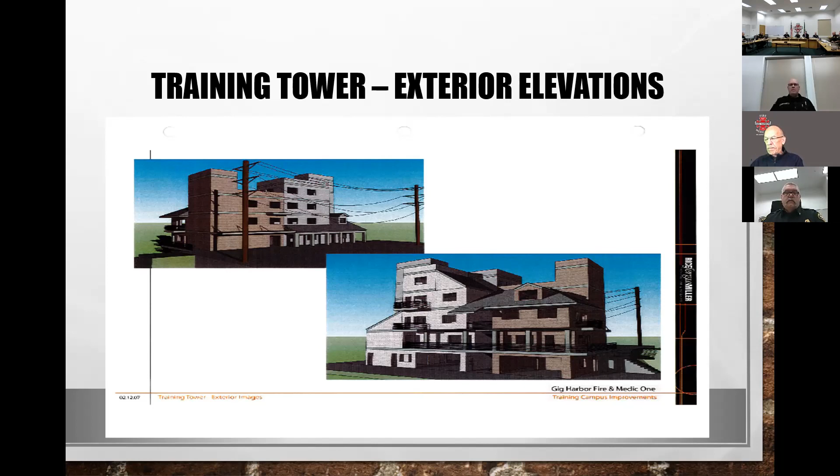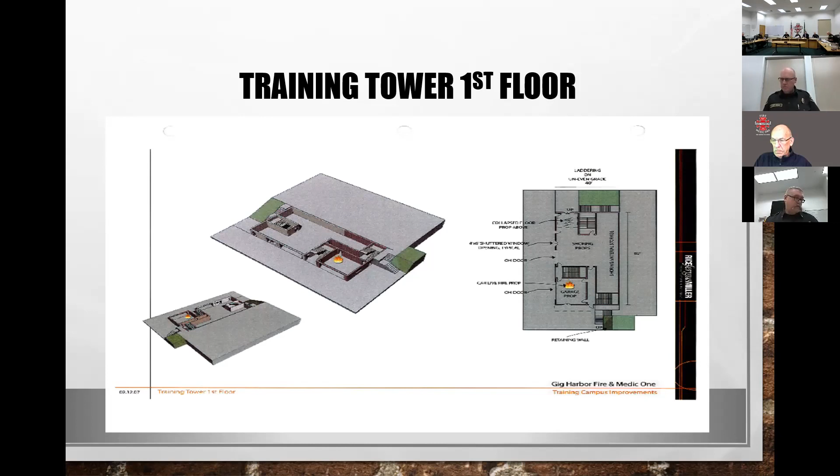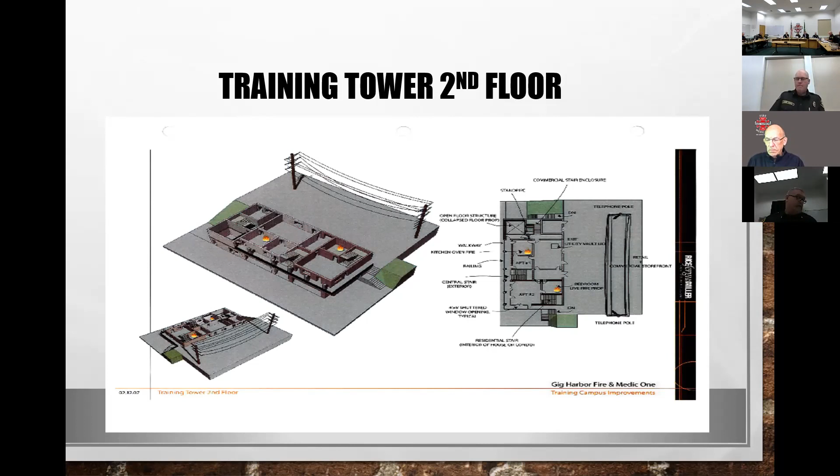Along with two different apartment props and bedrooms, with a live fire prop on floor 2 and the live fire prop in apartment number 1.

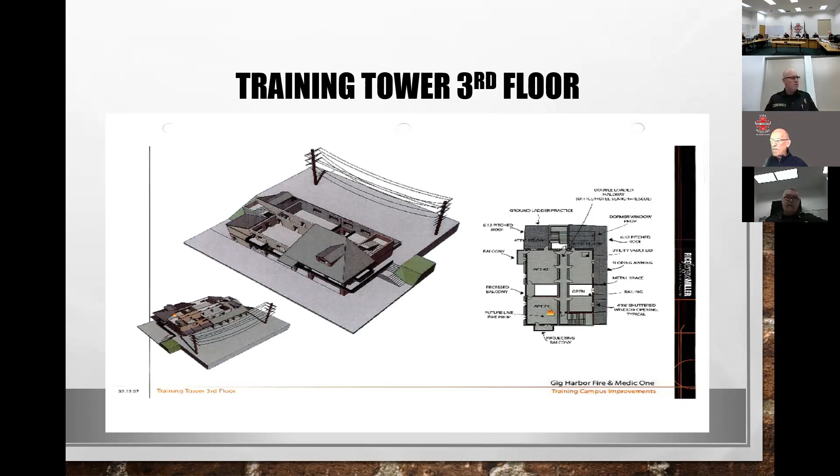We have a pitched roof prop, two different pitches for vertical ventilation training, with some balconies that are going to be used for viewing of the folks drilling potentially on the ground below the training tower.

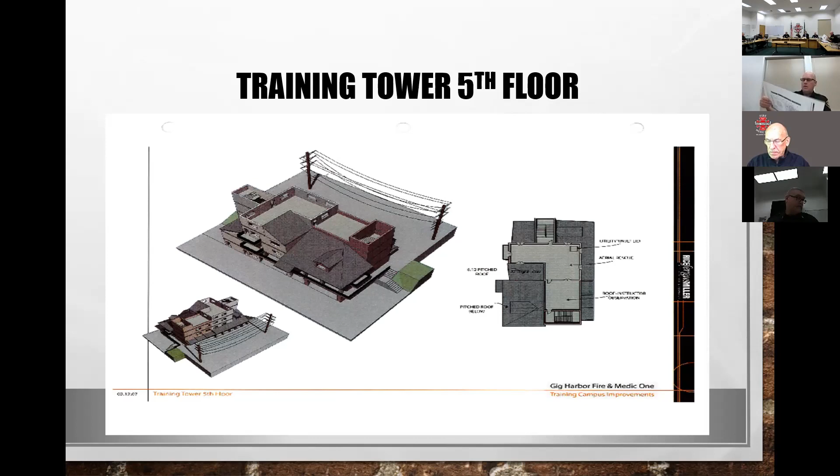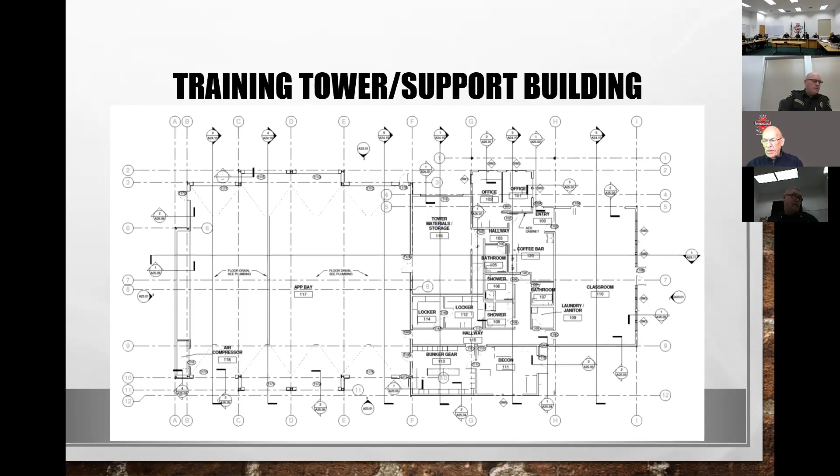As our training needs have changed, based on these drawings we are looking at making some simple changes, simply adding an elevator and making one of the storage areas a classroom, using the elevator as a training prop and as access to the 2nd floor.

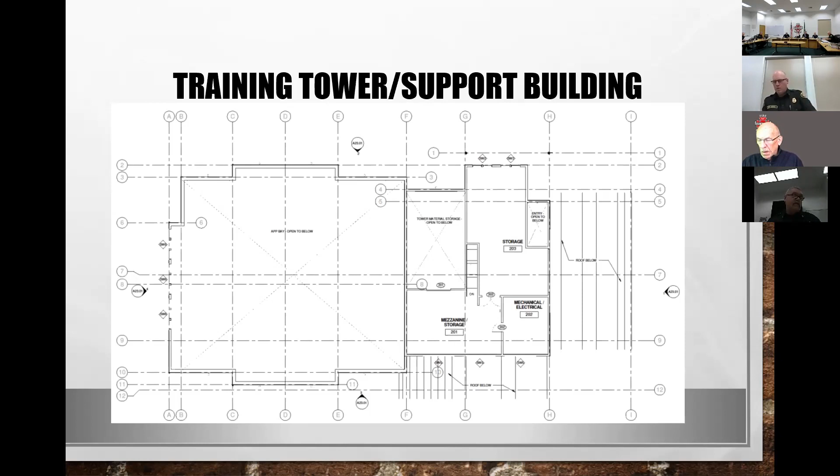As we gain structures of height requiring elevators within our district, we're encountering more and more elevator rescue, and that opportunity to put one in for us to train on within our training facility will help us out greatly.

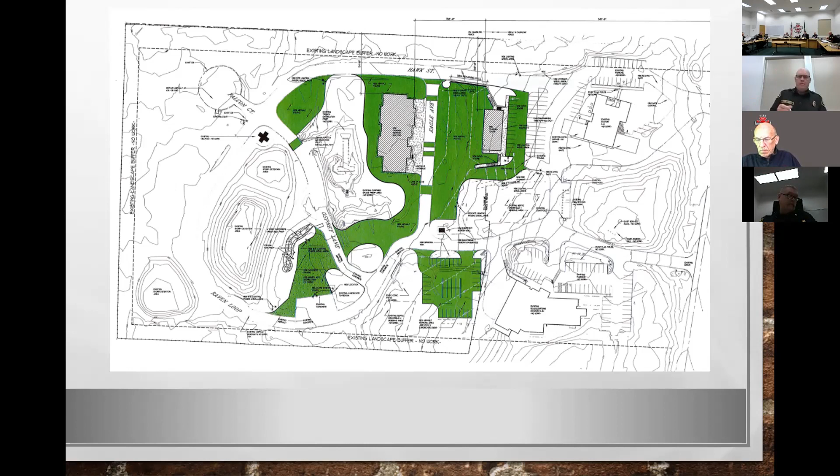So we have cost breakdowns for each project. As I said, they're estimates. Right now, our highest priority is completing the training campus. So we are looking at the training campus as being our first building, if the capital facilities project is approved for moving forward.

Once again, those numbers aren't included here, but if we look at the overall cost, the training tower alone is $7,413,300. Moving over to the support building, $7,281,000. And then just the site improvements for us to be able to do the work, the extra paving and those things, are $3,305,154.

If we look at the top, it's estimates, with construction cost escalation of 6% per year, moving from April of '22. And then down below, we pay sales tax as a fire district to build something just as well as anybody else does. So we have Washington State sales tax, architecture and engineering fees, specialty consultants, permits, testing and inspections. Some of the furnishings and equipment would be the tables, chairs, office furniture, those things we're looking at including.

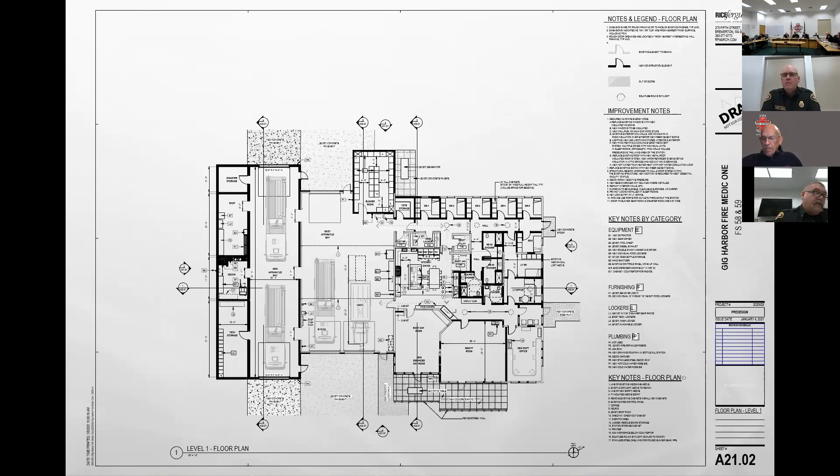For the firefighters, we still also have new walls there, a new public entry, which we can isolate - if someone comes into the station, they can come into that space without gaining entry into the rest of the station unless we let them in. So if we go to the next slide, it's a little better of an illustration.

Any questions so far? All right.

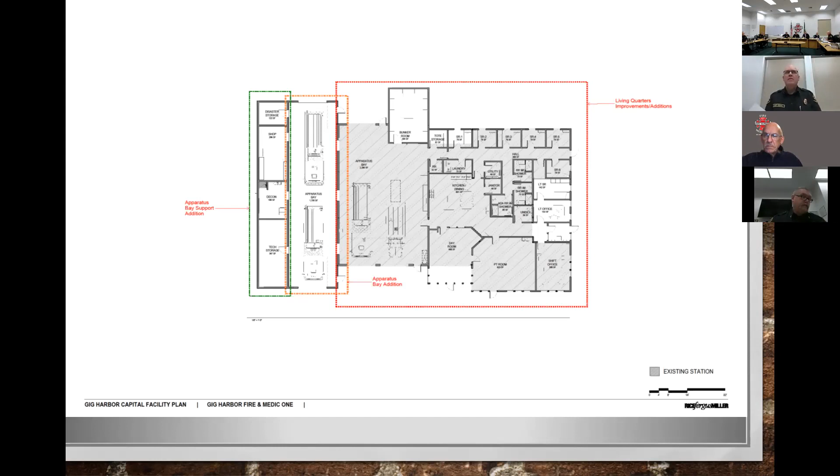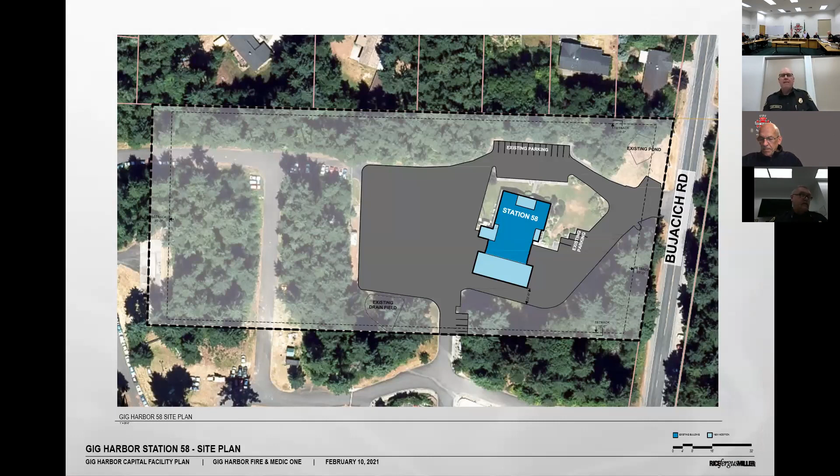Next few slides, we have one of these for each of the requested capital facilities, simply showing you that the light blue are additions, the dark blue is as the station sits currently. So that's for station 58, and then 59.

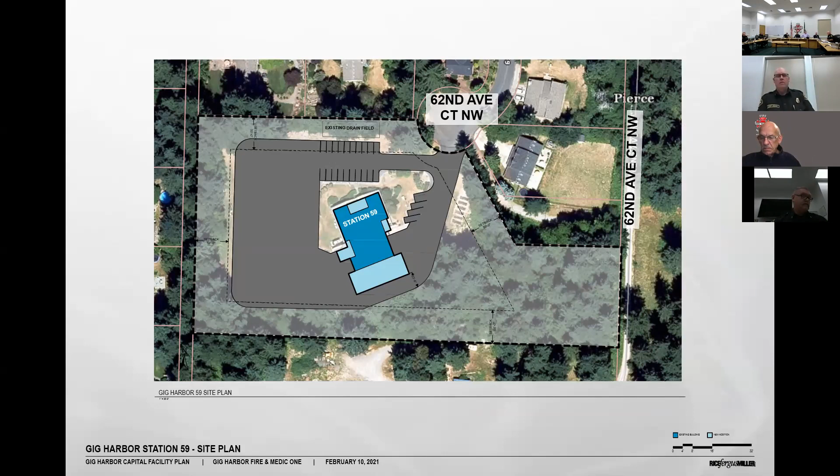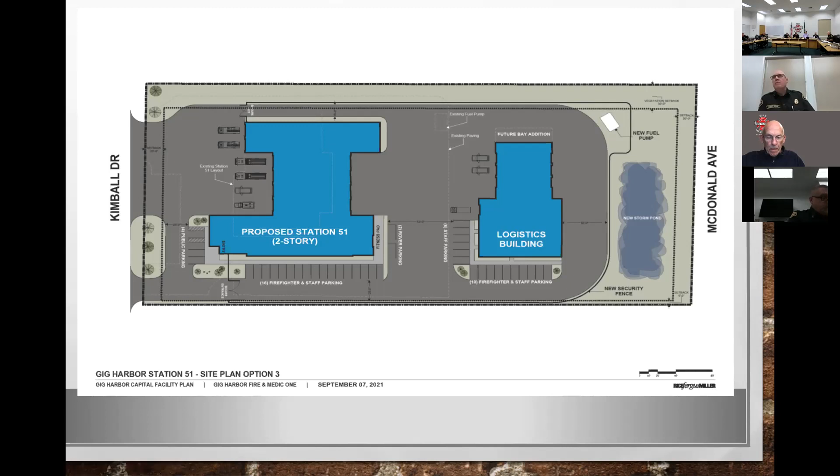Moving across the drawing towards the bottom, we have 4 bays with a different array of equipment. We're not sure what it will be in the future, but we have the ability to go out the front or out the back. Our primary response vehicles will all be out of the front of the station. On the drawing there's 2 engines, a truck, and a medic unit, but we don't know what that configuration will be right now. It gives us the space to do what we want.

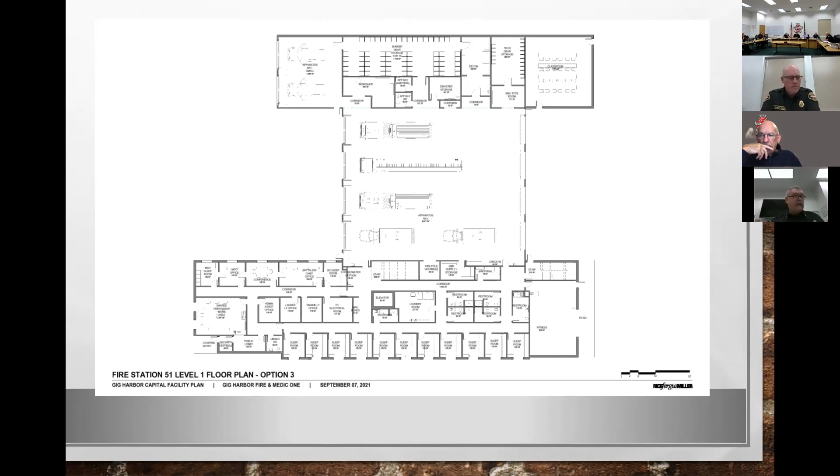Any questions for station 51, floor 1 or floor 2?

Is this where you anticipate having the ladder truck? I wouldn't answer that right now. We're still looking at our strategic plan and response calls and things. I just said that these are simply drawings of random apparatus. We're not sure what the ladder truck would be right now. We're still working on that piece.

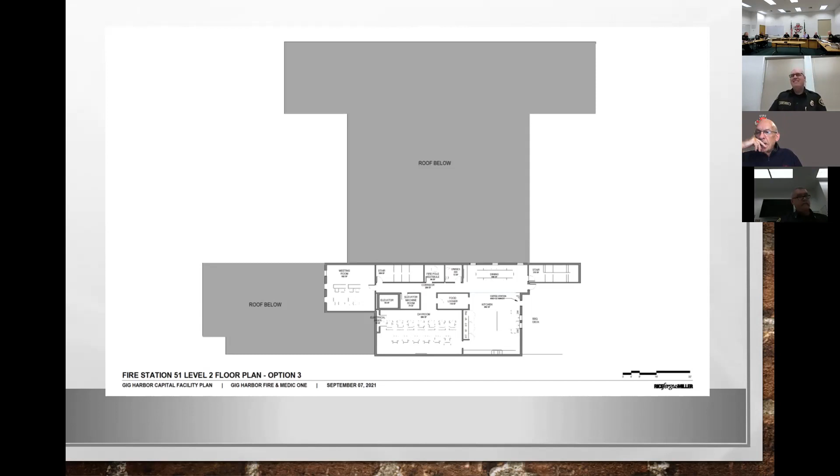All right, we'll go to the next drawing. So, our logistics support building. If you look at our current station 51, we have all those things, but not as much room as you saw on the plan. We've outgrown it. But within that structure we currently have, there's a lot of other things going on, including some temporary structures to the rear of the building. This logistics support building would take care of those things.

Currently we have 3 trailers out back with various uses that this would allow us to bring in. It would allow us to have shipping and receiving at 51, more of someone just coming to the front door and dropping packages. At 51 is our main medical supply, so as stations use their supplies out of medic units and start getting into the reserve stuff, they would come here instead of going into the main station and interrupting the current crew that's sleeping.

As COVID came along, we found that we needed more medical PPE. Currently we have that stored at another station. If we move forward with this, we move all of that increased supply of medical personal protective equipment to station 51. We have fire gear storage right now in a small area at 51, and this would give us the storage for that, as well as uniforms.

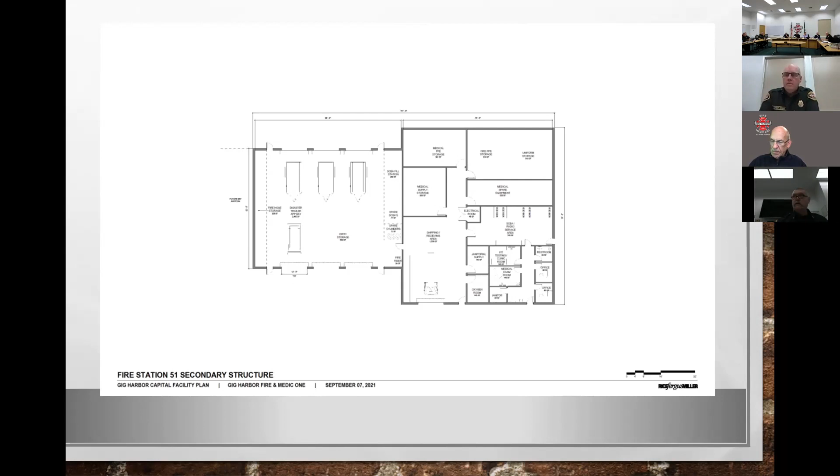So the highlights: new station constructed to meet current building codes, unisex sleeping rooms, unisex showers, expanded footprint because we're just kind of out of space. Updated fuel island to meet the current code, and then the logistics support building for what's going to happen on this property.

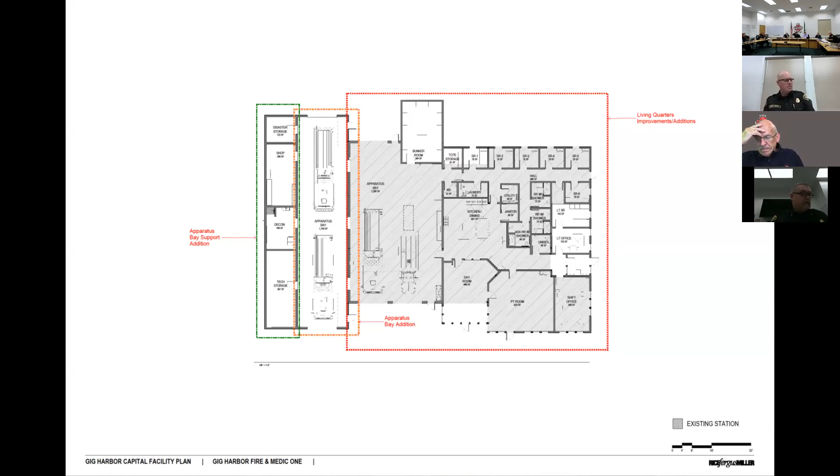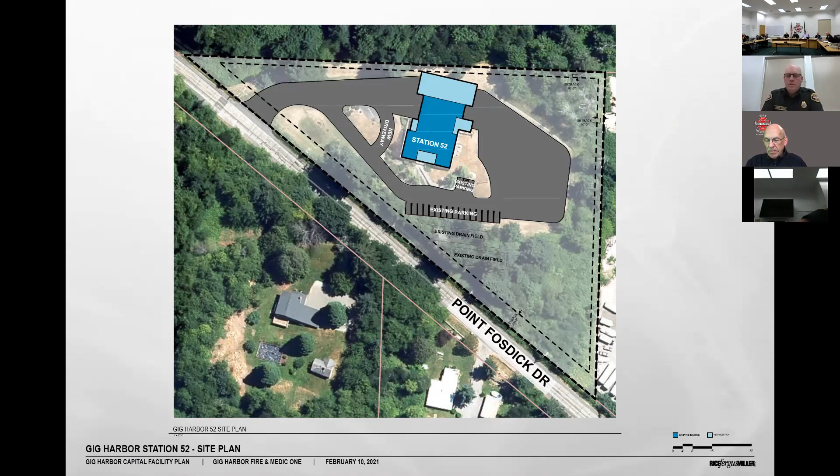We'll see one of these for each building. Specifically highlighting this one, if you look at it, Station 52, the light blue area to the top of the page, it will take us to the edge of our area that we're able to work in. So what will be required at Station 52, it won't be a drive-around station. We will have, as it's noted, a new driveway where the engine company will pull up, circle back, and then back into the station.

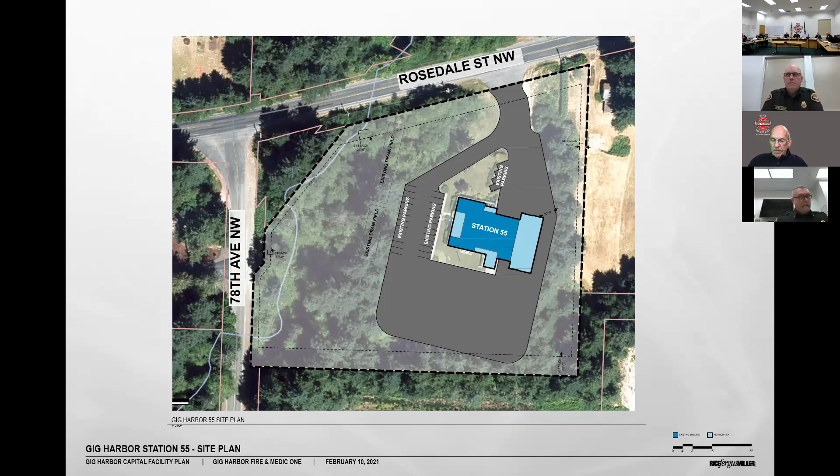That's the major difference between this station and the rest of them. 55, no different. This one we're able to drive around. We still maintain that barrier and able to drive around the station. 56, the same.

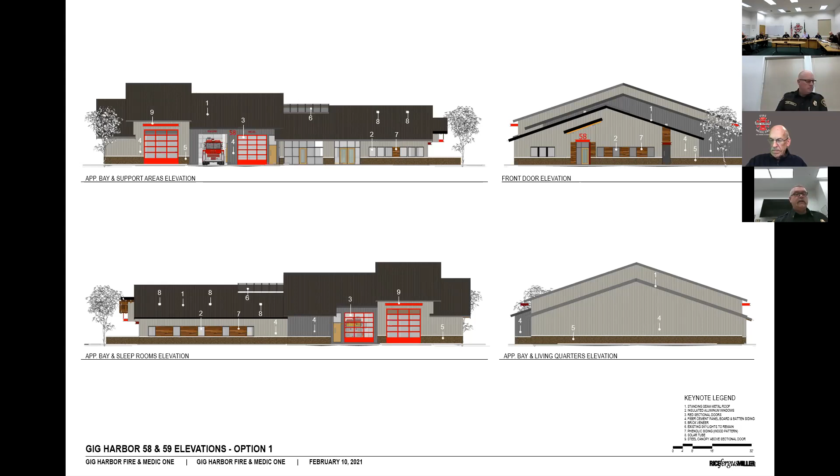And then if all three options were done, the station would look exactly the same as 58 and 59. If it was chosen to do one or the other, a variance of them, it would obviously change the elevations that you're currently seeing. But if we did all the stations the same, they would look the same as this elevation.

Temporary housing for this station is cheaper. It's one engine company, and we're not moving a bunch of people and spreading them out across the district.

55. So if you remember the price from 52 to 55, it's $1,200,000 more. That's because in the original plan, as we estimated out, Station 52 would be done in '26. Station 55, if we did it, would be done in '29. That's that large cost escalation as we moved out. One of the unknowns, so there's a significant cost escalation there.

And then moving to 56. 56 is just a little bit more than 52 because it takes place right after, and 2 years before 55 if we were to do it. So 56 is $9,384,073.

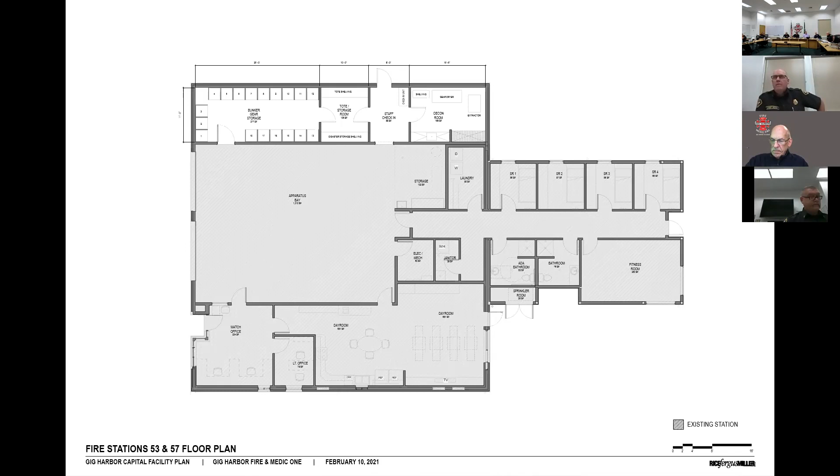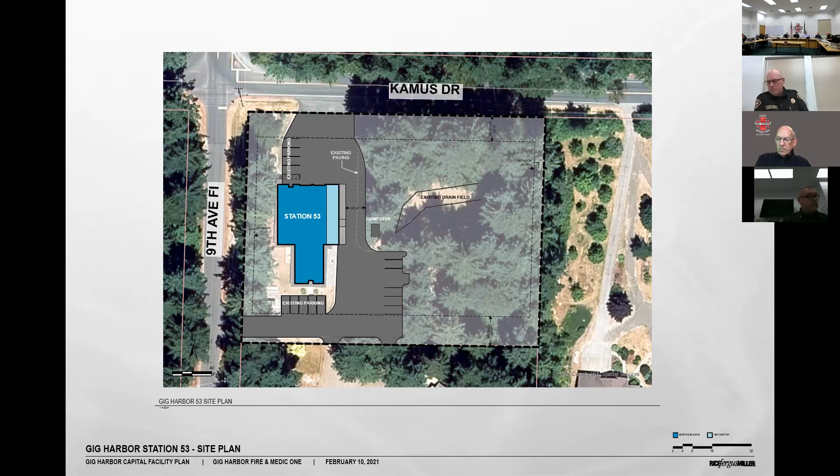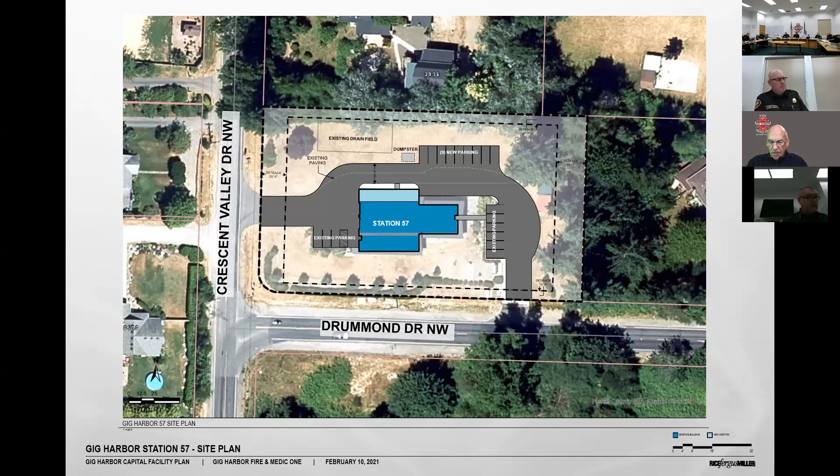So station 53, once again, as we move forward, in the estimating plan was 1 of 28. So total cost for that would be $1,129,613.

And then 57 is $1,189,456. Doing them 6 months apart, the price difference is we're adding some asphalt and some parking on those 2 facilities.

So breaking it down, is any questions for stations 53 and 57?

57, Chris, I know the front part of the driveway there is like blacktop. Is that how the rest of that? So that's going to be current code as we go through it. Yep, same thing on the drill ground. And any of the new proposed projects, a certain percentage is going to need to be porous, and that's accounted for.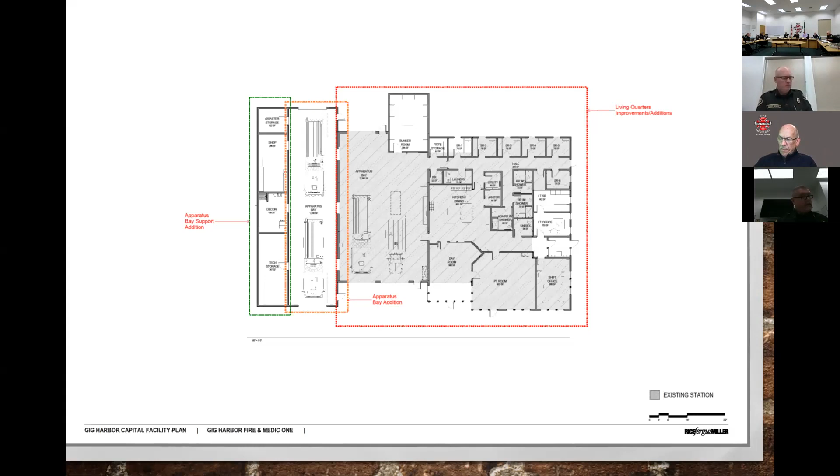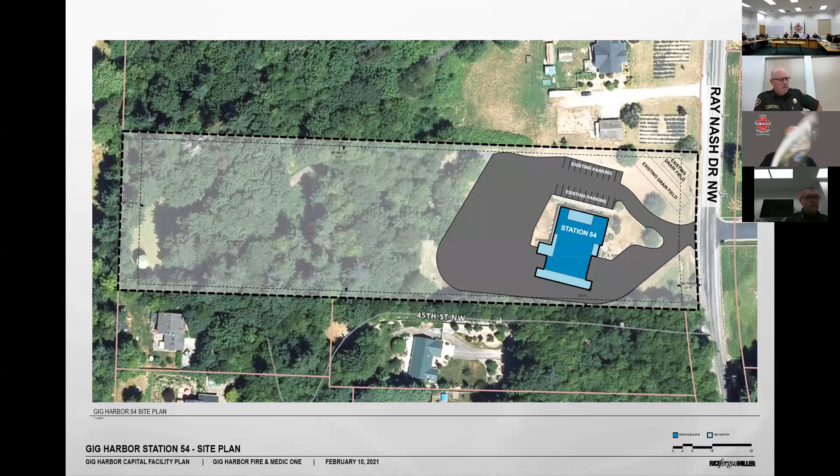The site plan of 54. And then 54, as you've seen and as I've spoken to earlier, the building is the same, it's the same plan if we did everything. The cost is more because this is one of the last buildings we added, so it's actually in 2030. So your cost is $10,354,000.

Questions for station 54?

All right, we're making this a little bit easy on me. Next one is our maintenance facility proposal. So our maintenance facility, currently we have 3 mechanics, 2 laborers, and 2 facilities maintenance folks working out of here. We're just looking to add a little bit more room for all of those things that we have.

Addition of a carport over the existing parking area to the rear of the facility with 20 amp power to each stall. Most of our vehicles now we need to plug in if they're not going to be run for any extended period of time because of what's in them. This would also account for construction of a new storage addition and expanded parking in the front of the facility.

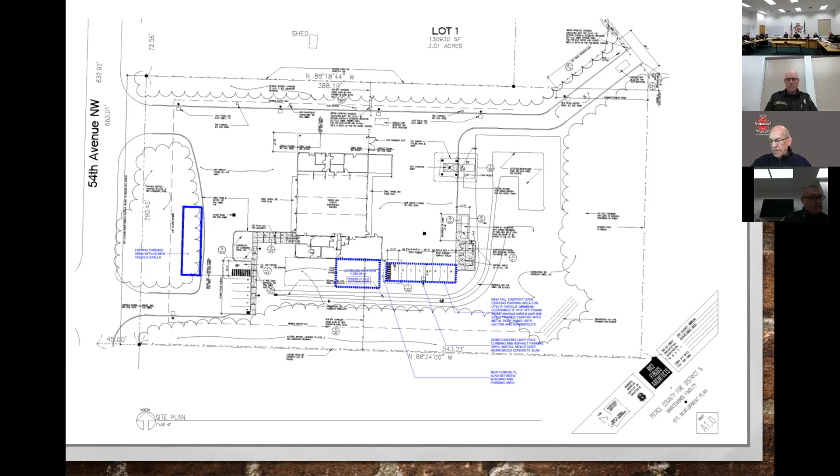Once again, in the estimates, this isn't going to be done until 2029. Obviously, that can change as we move things up. But for those changes, the total cost would be $1,722,825.

Questions about the maintenance facility? I missed it, when was it built? I do not know originally when the maintenance is... 05 would be a guess.

The big number with all of those projects, if we did everything proposed to you on that timeline and the estimators were exactly on, we are looking at $117,790,733. The graph shows all the projects lined up from training campus on the far left, which is a high priority for us because of the conditional use permit, moving through station 58, 59, 51, then 52, 56, 53, 57, the shop, 55, and 54.

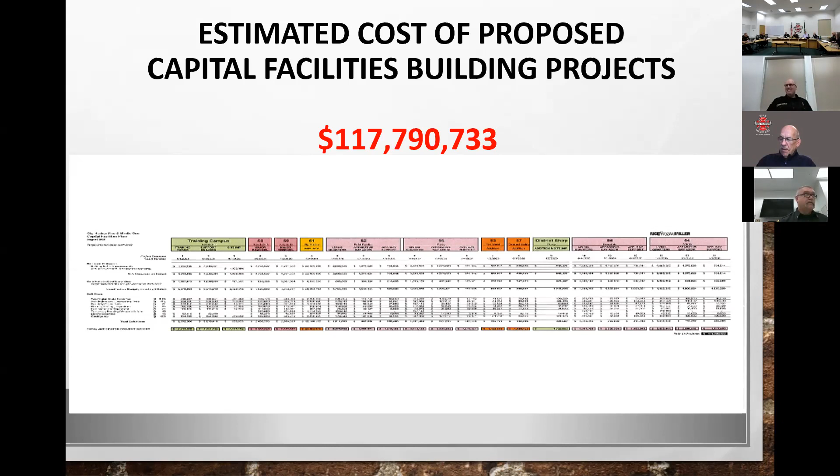So I have more, if we go to the next slide. That's capital facilities. Chief Doan thought it would be a good idea to cover some of our other capital items that are coming up. In addition to the need to improve or remodel our stations and facilities, the district is evaluating the need to replace and build the following items.

Our rolling stock, our fire engines and medic units, that's what gets us to the calls and out. Our SCBAs, and then communications, which would include towers and radios. We'll go into that breakdown relatively quickly.

Engine replacements: our current fleet's lifespan for a frontline fire engine is roughly 15 years with another 5 as a reserve. Below that is the breakdown of the year, how many, and what station they're currently assigned to. The oldest equipment we have are two 1995 Pierce Internationals at station 53 and 54, and going down the list to our newest at station 58 and 52.

We have a close example. East Pierce just went through capital facilities and rolling stock replacements. Casey Meyer and I have looked at the engines, and it's close to what we would want. I've talked to Hughes Fire, which is the Pierce representative. Roughly 775,000 by the time we escalate costs because of price increases coming, which we're not going to do anything about, so per engine at $775,000.

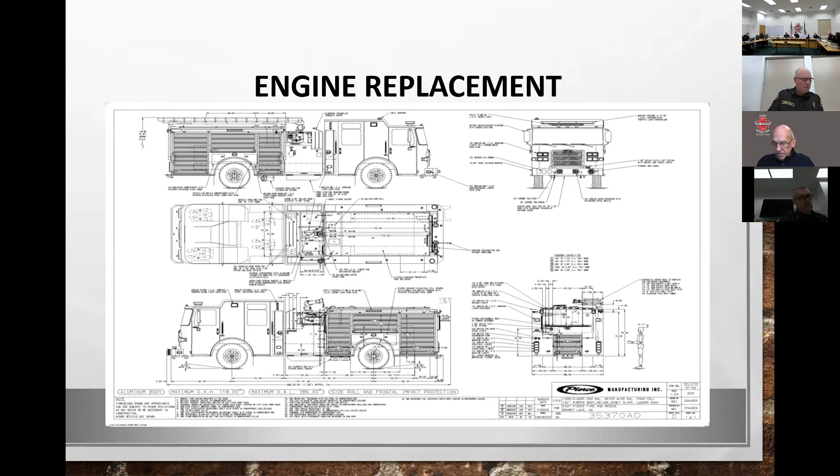If you flip to the next slide, it's just a schematic drawing of it, and for most people, the beautiful engine that it is on the page. Not saying we're going to this paint style, it's just the example of East Pierce's fire engine. It's the most recent from this year, they took delivery of it, and it's the closest to us that have taken delivery of something equivalent to what we would look at.

There are options for engine replacements: loan programs through the state, purchasing outright, leasing, but we wanted to get that in front of you as well.

So medic units: over 80% of our calls are medical in nature. Current lifespan of a medic unit is about 10 years, and we do run these a lot. What you see before you is the reverse order of engines, I just realized that, so our newest is at the top, our oldest is at the bottom.

And then if we split the page, I don't know if you can make out the details, most of our medic units come from Braun Northwest. She gave us this from May 13th of this year, speccing a 2021 ambulance to our specifications. You'll see it says, if you can make it out, 227,000. That doesn't include sales tax or some of the capital equipment that we carry in them, so we're estimating $325,000 for a brand new medic.

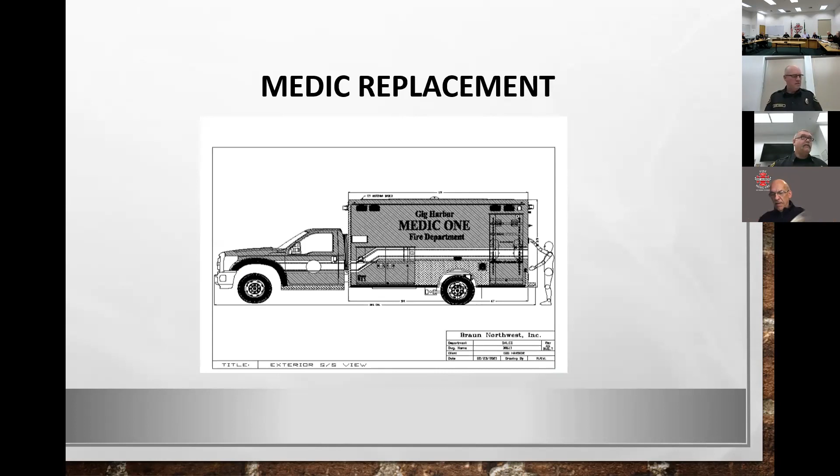SCBA replacement: the current SCBAs were purchased in 2008. The air bottles have a 15-year life on them, and the bottles will expire in August of 2023. People have asked a multitude of questions - simply put, we don't want to just replace bottles, because technology, as with anything else, has greatly increased over 15 years. So we will be looking at a total replacement of the entire fleet.

The other thing is we are out of warranty on everything on the SCBA, so if something breaks, we buy it. If we were to go to Scott, the new warranty is bumper to bumper for as long as you own the pack, except for a very few things, so that cuts down on repair costs for us as well. Next slide.

So we're looking at Scott - you have a Scott picture in front of you. Nothing is set in stone, I'll say that, but I will say, personal view, I love this pack. The new one is an NFPA 2018 edition. Depending on how it works, we may have a new edition, we may not - it varies, sometimes the editions are even a year late because of what they want included.

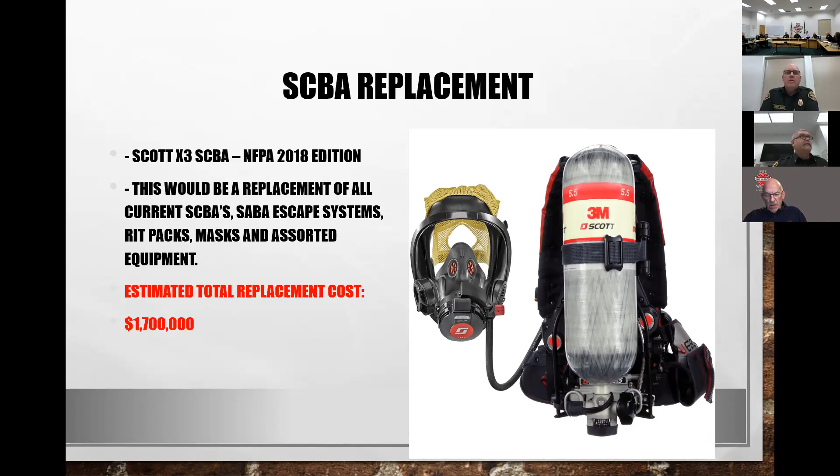In 2008, I spent $791,000. So do that escalation for 15 years - they're not cheap, but it is what it is.

The final thing: communications and radio changes. Currently, our fire district works off the 700 megahertz radio system along with Key Pen and a few other smaller departments. Larger departments in the county are working off the 800 megahertz system. Future costs or changes - we may need to go to the 800 system, and future costs might include adding additional radio towers so that we get better service within our fire district for the 800s. Those costs I have not looked into; it was more of, here's something that's coming down the road, but I don't know costs.

Are there any questions about those four items: engines, medic units, SCBAs, or communications? We wanted to put communications in there just to keep it in the forefront of our conversation. When we say unknown cost at this time, it's just that as the pool grows smaller, the costs go up for us. What are we going to do? That one's a little confusing, and I just want to keep it in the forefront that we have to figure something out in the near future. Commissioner Wilson, I think.